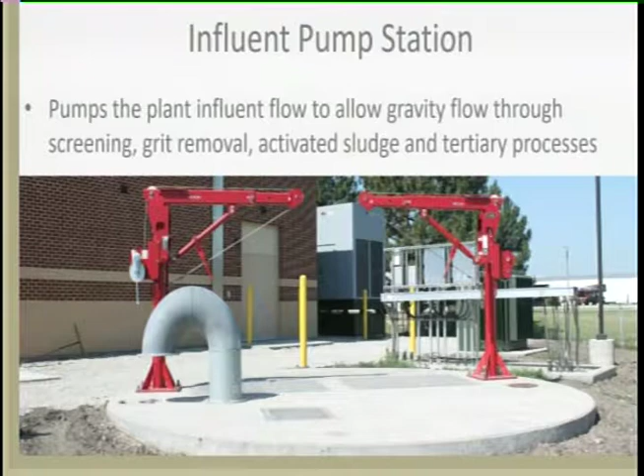To start things off, flow from the city's collection system goes into the influent pump station, and that flow is pumped up to the headworks facility where the screening and grit removal takes place, and then it can continue by gravity through the rest of the treatment processes.

There were some improvements to things like the septage receiving station, which provides a beneficial use of the treatment plant to the public for off-site septage loads. Some things were installed along with that, including valve control and a washdown system. We don't have it in our slide deck tonight, but there's also a reuse filling station out at the plant where contractors and county workers can come in and have beneficial use of the reuse water, the treated effluent from the plant.

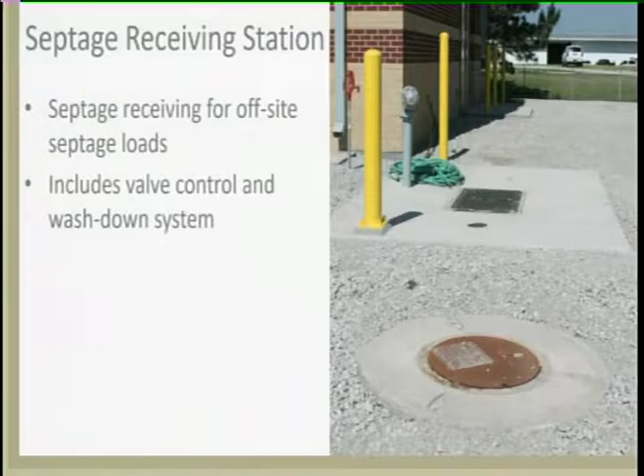Next you'll see the generator. This is a large generator located next to the headworks building and the electrical room there. It provides backup power generation to the critical process equipment at the plant should it lose power.

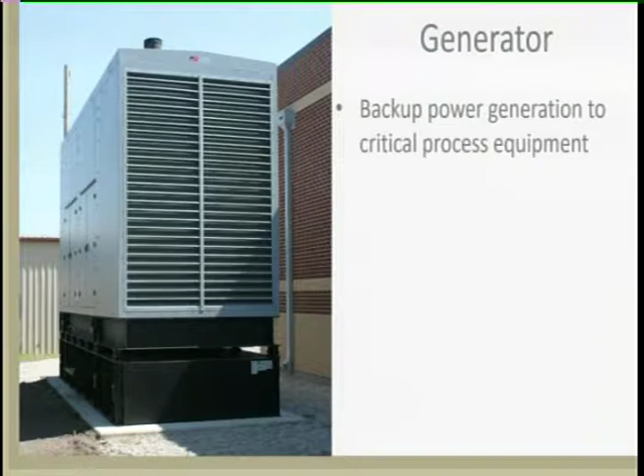Then to the headworks, there's a few photos here, one showing an aerial, one showing the screening equipment in the middle, and one showing the grit removal equipment at the bottom right. That's a 2-story structure there.

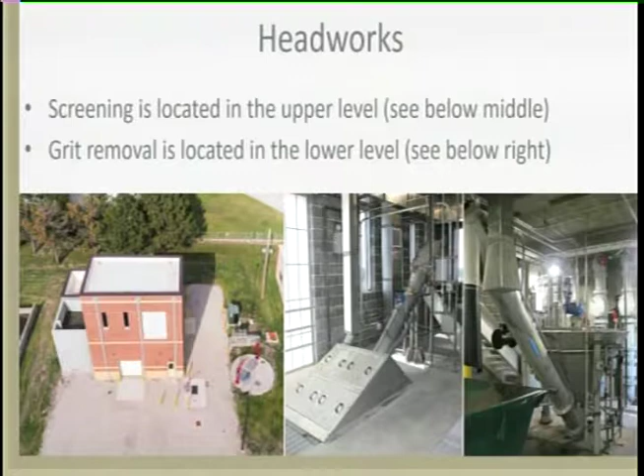This is one of the cool things the city did to showcase the project: they provided the aerial imagery you see in the slides tonight, and also a webcam for the duration of the project that showed the progress here at the headworks.

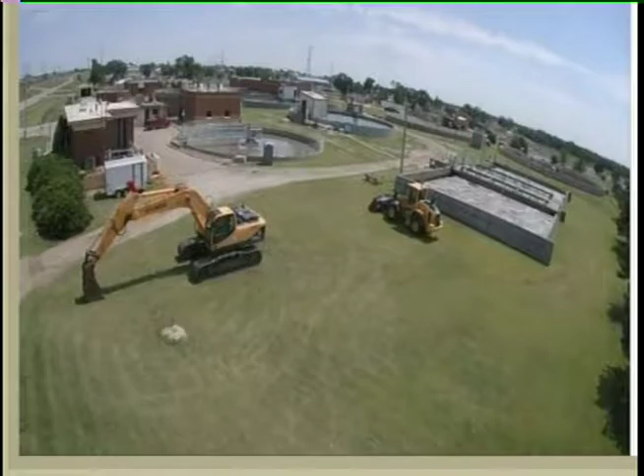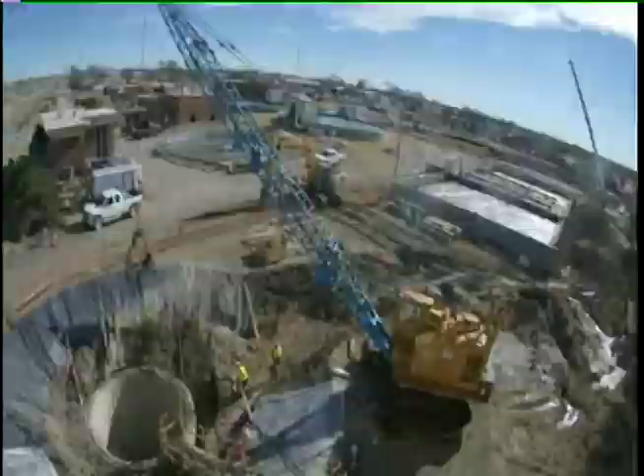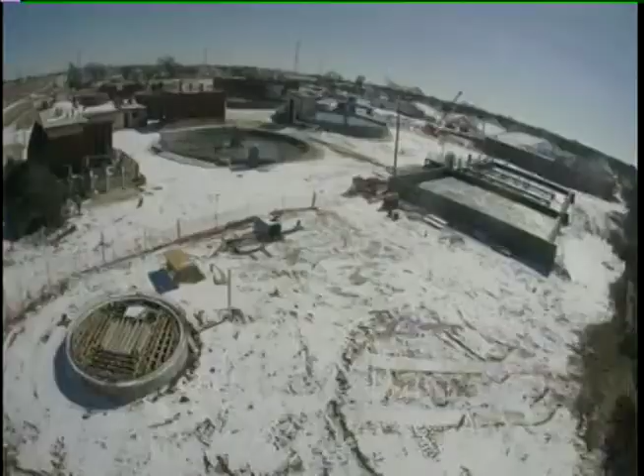So we have a quick time-lapse video that I'll briefly narrate showing the progress up at the headworks. It started out with that influent pump station, which sits at grade, but the contractor is installing a caisson construction where they drop nearly 35 feet into the ground, where it operates today. The headworks begins.

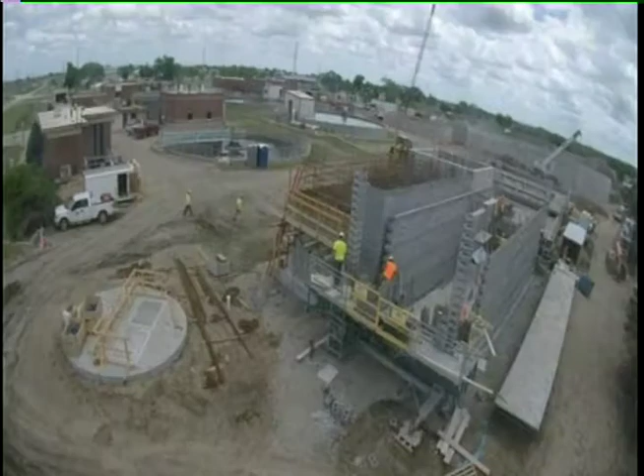It's worth noting that there was no time loss on the project and we worked in all weather conditions. Those brief flashes of white are snow from when we were pouring concrete, among other things.

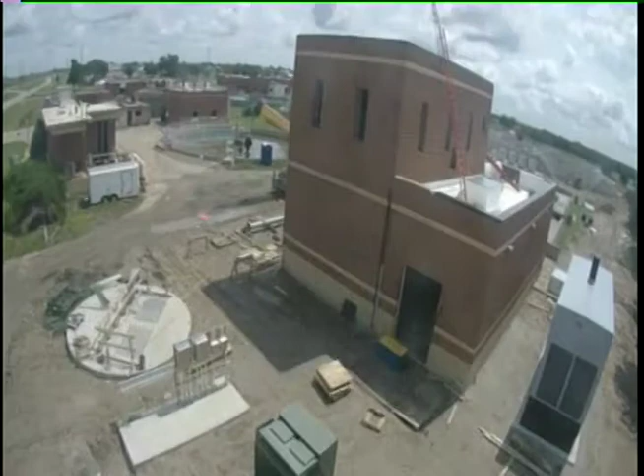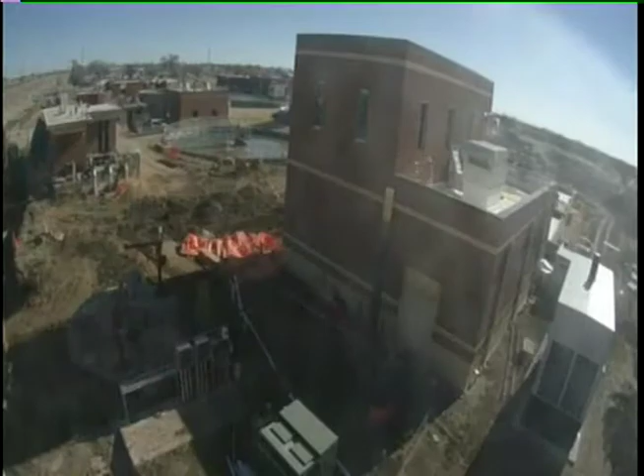We're getting close with doors on the building, then new site piping and HVAC. Then it'll move over to the new admin space in just a moment and show some of the structures there too.

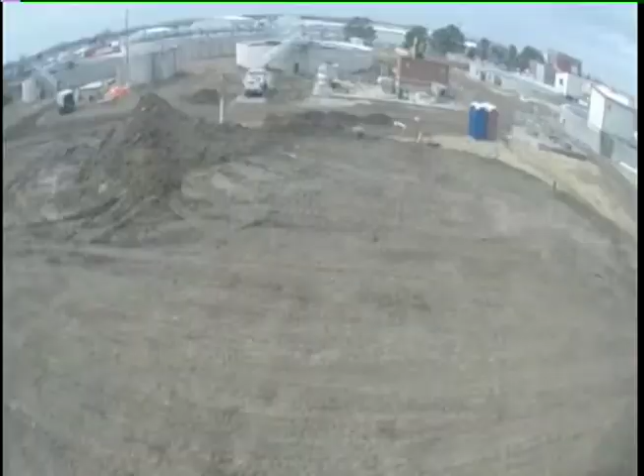Parking lot, main entrance there to the admin building. In the background, you may have seen the aeration basin.

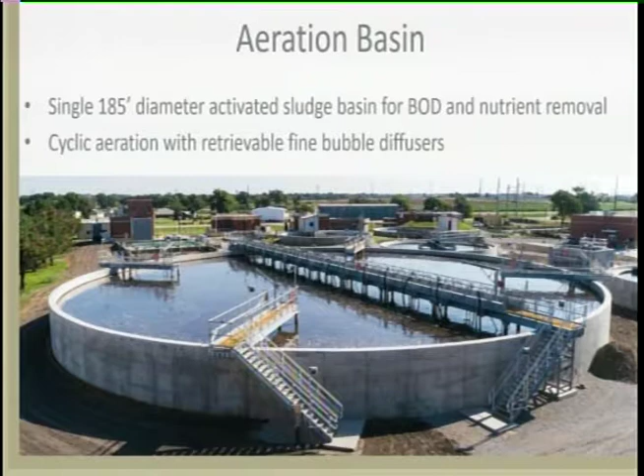This is the single 185-foot diameter cyclic aeration basin that provides the BOD removal, that's biochemical oxygen demand, and then the nutrient removal to the plant. It provides aeration along this bridge via the diffusers, and there are 4 additional mixer bridges that provide a complete mixed environment for that nutrient removal to take place.

That aeration is provided by a new set of blowers shown here.

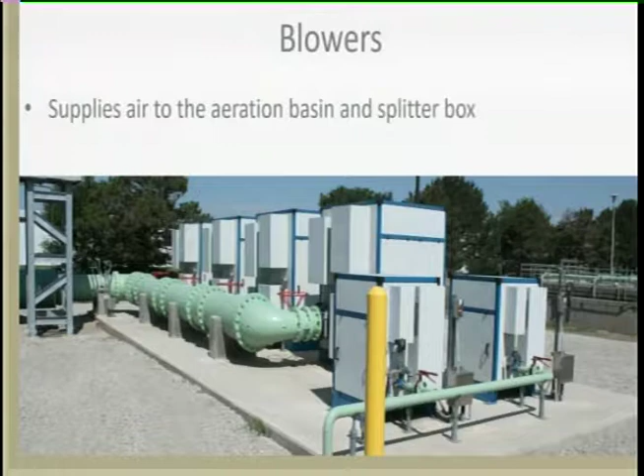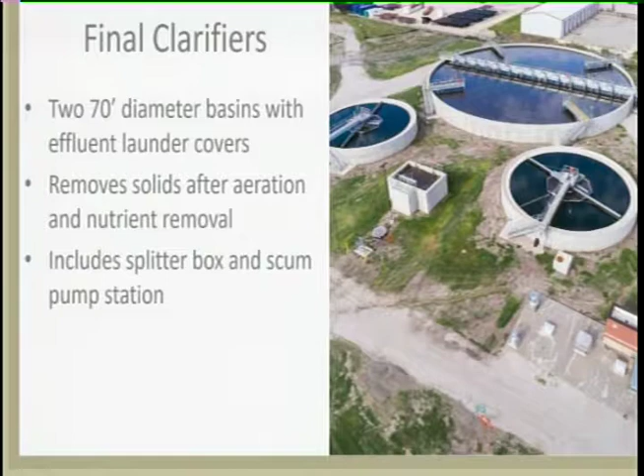This filter removes some of the finer particles from the treated wastewater, and it also helps facilitate phosphorus removal, increasing the nutrient removal and performance of the plant.

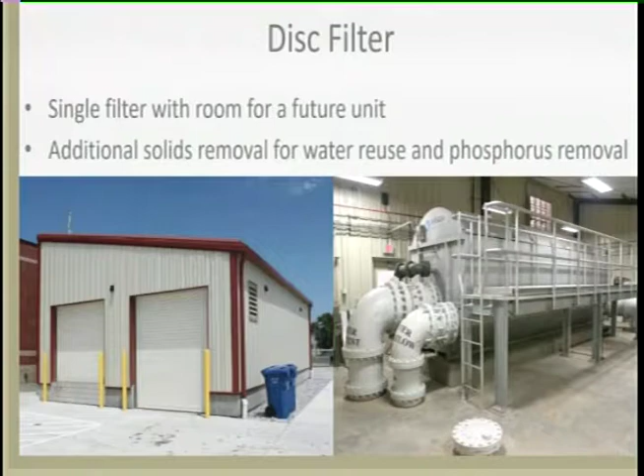Water from the filter building is then conveyed to disinfection. Here we have the ultraviolet disinfection system. It's a fully closed vessel type system, so it's very clean. We ate lunch in the space adjacent to this room today, so it was a very nice environment.

One of the big highlights for Jason, his staff, and the city is being a chemical-free treatment process now. This ultraviolet system allows us to achieve that, using electricity instead of chemicals to achieve disinfection.

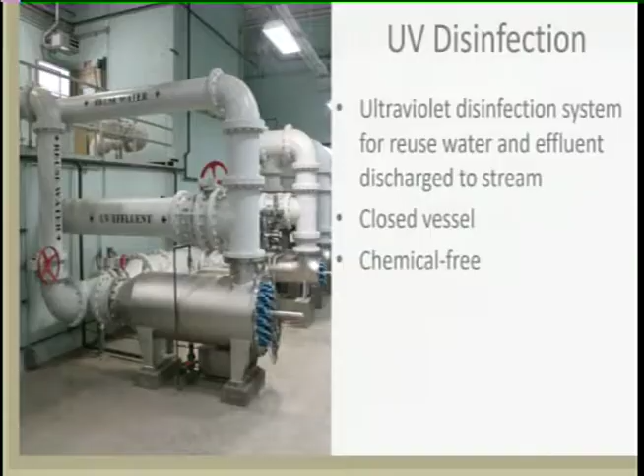From disinfection, we can go out to Chetolah Creek. This was just an opportune time to take an aerial photo. You'll see the plant outfall located here, and there were some improvements to the embankment around that outfall. This photo was taken after a recent rain event, and you can see how clear the treated effluent from the treatment plant is compared to the suspended solids out there in Chetolah.

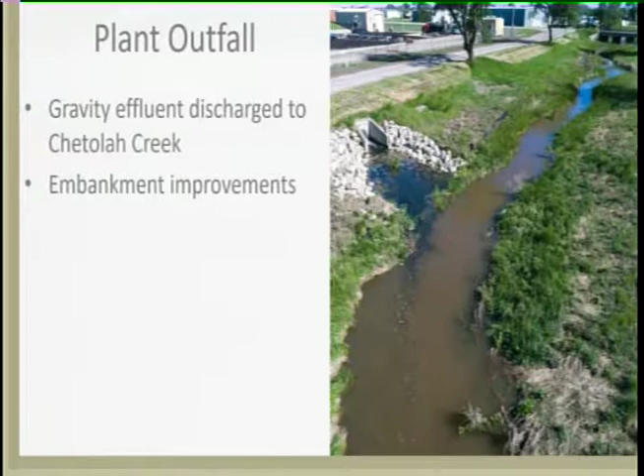Real quickly I'll touch on the reuse system and then some of the solids too. First we have the effluent pumps located adjacent to the UV area, where the effluent is pumped up to the reuse tank shown in the bottom right. We installed protective coatings to those basins to extend their life so those tanks provide storage for water before it goes out.

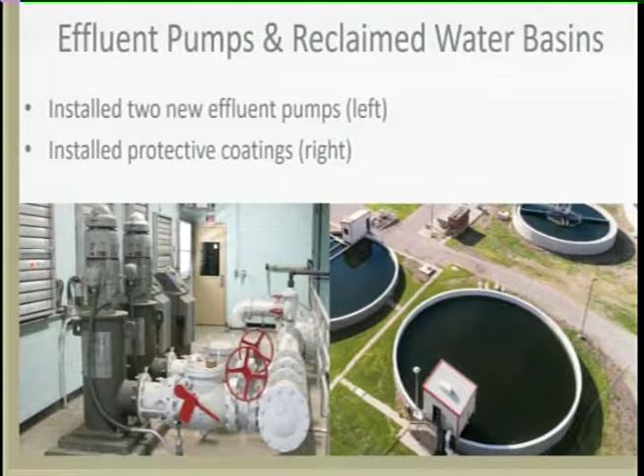It goes out to the golf course, for example, or other beneficial reuse in the city system. One of those off-site storage locations is the golf course. These golf course ponds existed prior to the project; we just expanded this one here on the westernmost side. You can see some of the piping installed to improve some of the overtopping that was happening at the golf course. That provides additional water storage for the golf course should they need it during one of the hot, hazy summers.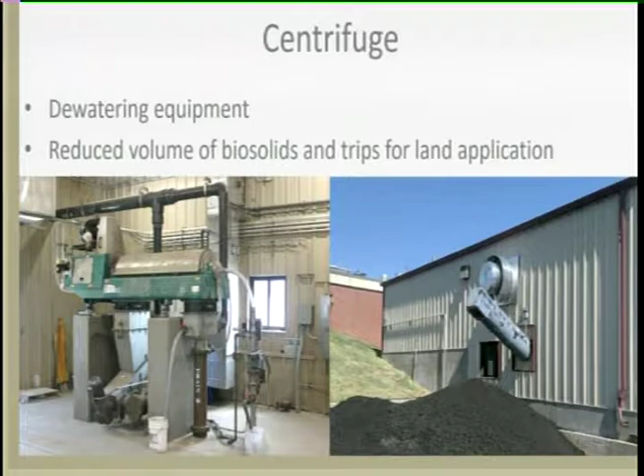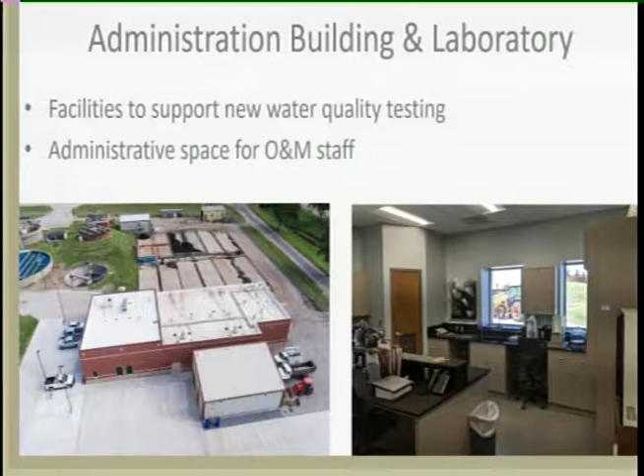And lastly, for me anyway, is the administration building and the laboratory here. Hopefully if you're out at the site today you get to tour those new facilities if you hadn't seen them already. It includes a new entrance to the plant off General Custer Road, automatic gates, parking lots, lab space, admin space, and control rooms.

We'll cover the SCADA controls and talk a little bit about the improvements made there. This is the brains of the plant. The SCADA provides on-site and remote operations for the plant. As you may know, the plant is staffed 8 hours a day, 7 days a week, but it is available for monitoring from the provided tablet or even a mobile device to address things if alarms come up, or if we just want to check on the status of the plant. We're able to do that.

Another maybe minor improvement, but it does improve communications with the systems integrator for this SCADA control and allows troubleshooting with the integrator if that's necessary. So far this has been running pretty smoothly. I know Jason likes to make adjustments on the fly sometimes just to prove that it works, and so far it has.

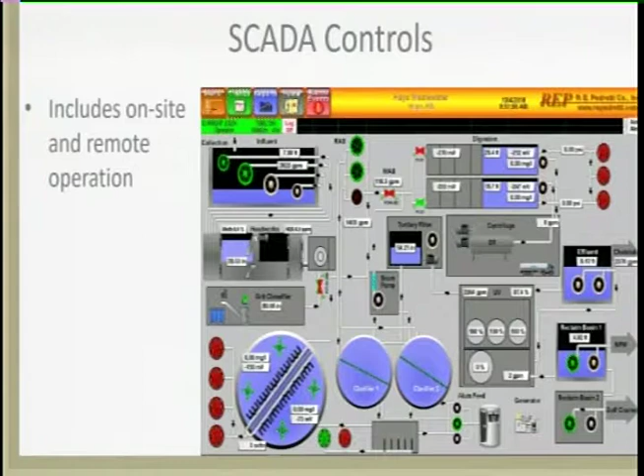And to cover treatment performance, I'll let you make the transition, Stan. We'll talk about the treatment of the plant itself. I might add too, as you know, the city extended fiber optics from City Hall to the water plant, from the water plant to the wastewater plant, and from the wastewater plant back to City Hall. So you also have capabilities at the water plant to view the operation of the facility and make changes. There's somebody on duty there at a time when there's nobody at the plant.

This is one of two slides that we're probably the most proud of. It summarizes everything performance-wise that this plant has to meet based on your current permit, which was put in place on September 1st, 2019. Those limits are shown here in orange, and the gray is limits that we anticipate, through conversations with Kansas Department of Health and Environment, will be future limits coming down the road.

KDHE is working with EPA doing TMDL evaluations and studies on the Kansas River, the Smoky Hill, and it reaches up to the discharge here from Hays. They've anticipated that in the future there will be much tighter nutrient limits. We've been talking about that since we started, and you probably heard about it many years before that. So what you see here, the green bar is a summary of all the testing data once we really got the plant into full operation and the weather cleared up, showing what the average parameters have been without really trying to performance test it.

You can see here clearly on BOD, with the green bar, that it's operated at 25% of the limit on BOD, about 30% or less of the limit on TSS. The limit on nitrates and nitrite of 10 has been running about 1.4, so a little over 14%. Ammonia is less than half, and phosphorus is right at the limit.

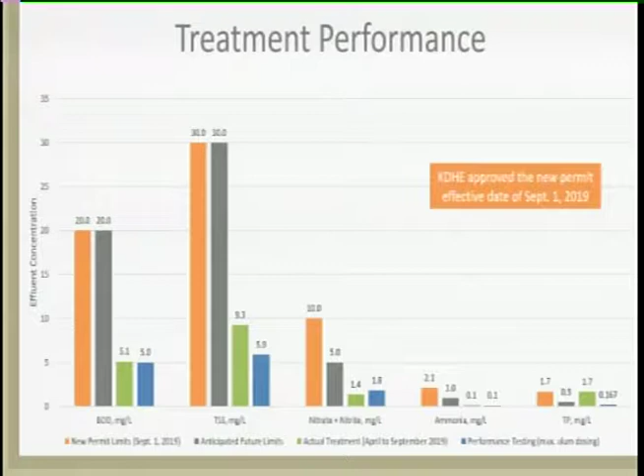The second slide is the cost summary. Like I said, there were no change orders. The design and construction of this project was $28 million. The facility planning and the owner's rep services was $1.5 million. During the SRF payout, where you were borrowing money during construction and hadn't started paying debt service yet, there was $205,000 in debt and loan interest.

Part of the contract negotiated with the design builder was that there were damages if he did not complete substantial or final completion within the contract date. But there was also an early completion bonus included, available if he was able to put this plant in operation earlier than the contract date. The idea was that there were many things contingent upon getting that running in the summer, when you can start it up in the best and most efficient way.

Certainly our services could be reduced by getting it done complete. So the city realized many savings, and this contract was set up for sharing that savings with the contractor. As we mentioned earlier, he completed it 59 days early, and there's an $88,500 bonus. The total amount of this is $30,272,000, which is pretty close to being right at the SRF loan amount. So the financial part of this plant was very successful, as well as the performance.

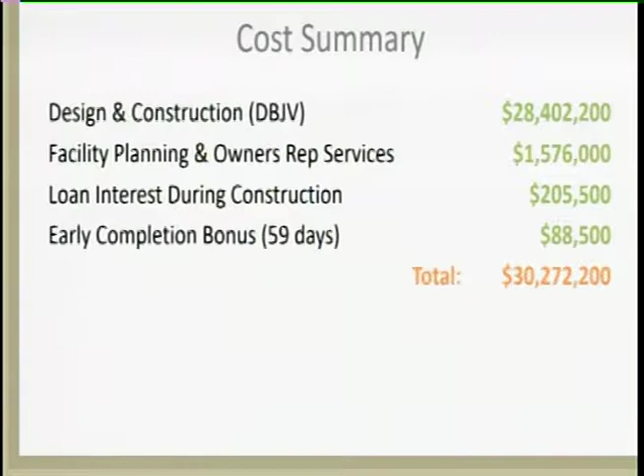Good evening, everybody. I'm Jeff Keller with Burns & McDonnell. I'm here with Travis Stryker, CAS Construction, and we represent the Design Build joint venture.

I just have a couple of slides here talking about the green solutions aspects of this project, and we chose a few that are more than token elements. They really provide substantial value to the project in a lot of ways. I just want to cover them very quickly here.

First of all, when Eric was showing the original photo from 2017 of the treatment plant, he showed you those trickling filters, those big round filters. Those were filled with rock, basically about the size of a softball. We had to demolish those, but the project also had a big demand for aggregate, rock, gravel roads, the aggregate that goes under the new structures. So when you think about it, we're demolishing rock and hauling it off and then buying rock to bring it in. That doesn't make any sense, and it's not a sustainable approach.

So instead, we brought in this rock crusher. It's quite a device, and it took those mountains of rock that we pulled out of your trickling filters and turned it into gravel, turned it into aggregate, giving a beneficial reuse for some of that demolition material.

That contributed to a big part of the savings we were able to see on the project. The next photo is the UV disinfection modules where we had lunch, and as Eric alluded to, it eliminated the use of gaseous chlorine at the treatment plant. Gaseous chlorine works great to disinfect wastewater, but it's also very, very dangerous, very toxic. Getting it out of there is a huge benefit, not just to the safety of your employees, but also to the safety of your community. So that's a big benefit.

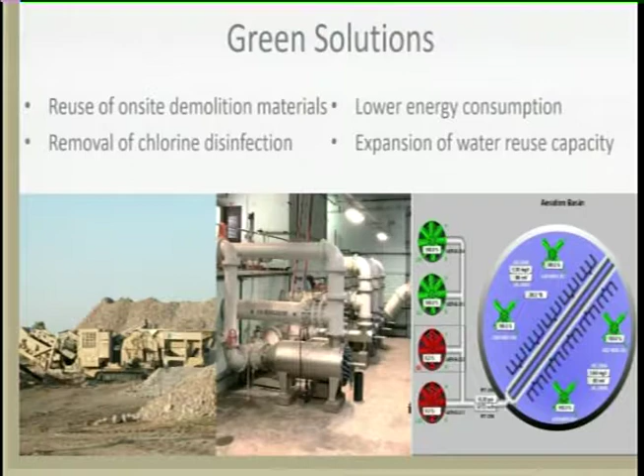I'm going to talk about some construction highlights now, but I really have to attribute this to CAS Construction, our partners, Travis, Jeff Pearsall the superintendent. If you guys met Jeff, he's a pretty impressive guy. He did a great job and was a main driver in making sure this project got done on budget and on schedule.

But let's note that safety is always a priority for us. We can't get work if we're not safe, and the more safe we are, the better we can be. So, 325 safety orientations—people coming on site being trained to be safe—and no recordable injuries, no lost time incidents for over a two-year period of activity on the site. That's a big deal, especially when you've got your own staff trying to operate their plant while we're running around them, digging holes, connecting wires, and doing all sorts of things.

I'm going to hit schedule before I talk about teamwork. The schedule came in 59 days ahead, with what I'd describe as more than just adverse weather conditions—68 inches of rain during the project. I don't have to tell any of you about the amount of rain we got. Snow, typical snow, lots of cold temperatures. But because of this teamwork, I think that played a big role in us finishing almost two months early.

So let's talk about teamwork—I mentioned this over lunch. Travis and I, and folks at Burns & McDonnell and CAS, have worked together for years. I've worked with them for 20 years, 30-some projects. We know how to do a job right and make it work well, but it can't work well if the other member of the team, the client's rep, isn't engaged, if they don't do their job well—it makes the project difficult.

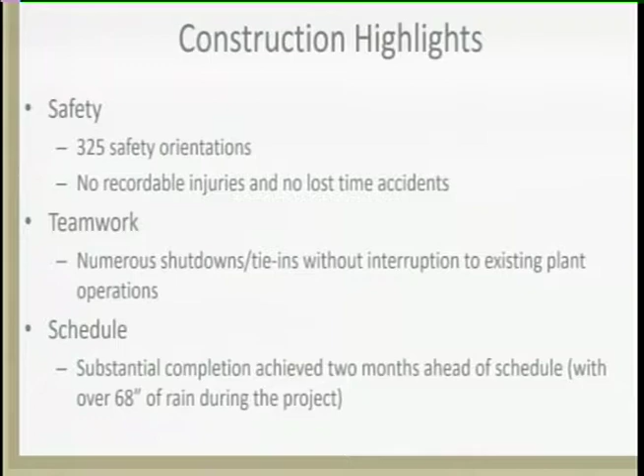These kinds of numbers are really a testament, not so much to us, because we were just doing our jobs, but to the city and the folks on the team, and HDR, who really made sure the project went well. We had a number of very late night tie-ins, interconnections, shutdowns, and startups where we did a lot of planning with Jason, his folks, and Jeff. They made sure that things worked as planned, that things happened when they were supposed to happen, and without their help we could not have been as successful bringing this project to you as we were.

So I just want to send another thanks out to the multiple people who helped make this successful.

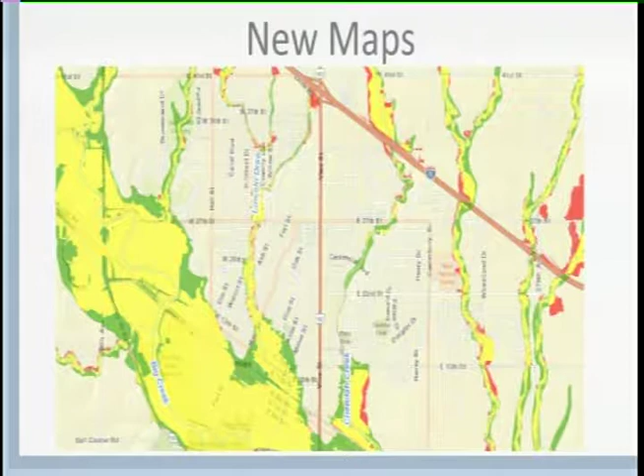So the maps will be different in a lot of ways. Besides the LiDAR topography data set I mentioned earlier, the maps will be based on two-dimensional modeling, or 2D modeling. This is much more accurate and actually depicts water flow in areas with limited development. We were told by FEMA and DWR that the Ellis County mapping project was one of the first all-2D Zone A projects done in the entire country.

This remapping project for Ellis County has been delayed for several years—we've been on the list since it started with the map modernization program in 2005. That 5-year project is now in year 15, and I think some benefits to that delay were our ability to use increased technology.

The new maps will be electronic, not paper as they are now. There'll also be lots of interactive tools available, such as being able to click on a parcel and get an accurate grade elevation, base flood elevation, and various measuring tools on any parcel within the county. Overall, the maps will be interactive—that's what they call the DFIRM, or the Digital Flood Insurance Rate Map.

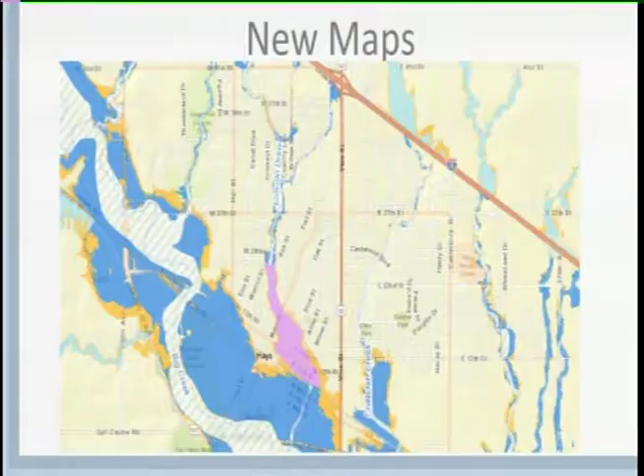This is a quick video that briefly shows the 2D modeling in action. I'm not going to pretend to be an expert on 2D modeling—I'll leave that to the engineers—but this is the type of work that was done. It goes pretty quick: the pink represents water flow and inundation of certain areas, used to model different elevations of the base flood during certain rain events.

So I mentioned community review, which has been going on for some time now. Public review will kick off with a public open house meeting on November 6th—I'll talk more about that in a moment. There's also a project website, which is very important for people to look at, especially if they're affected by the floodplain. The website contains the draft maps I showed earlier and other pertinent information such as story maps, timelines, meeting presentations, and technical reports.

Due process requirements for state law and FEMA after the map is completed take up to 1.5 years. This includes several layers of quality review, a 90-day appeal period, and a 6-month period for communities to adopt the new maps and update floodplain ordinances if necessary. That being said, we're looking at an effective date likely sometime in 2021 at the earliest.

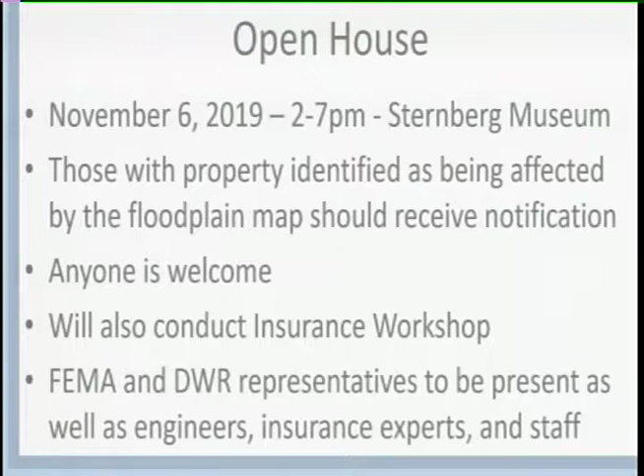It's a come-and-go meeting, and anyone's welcome to attend. There'll be individual laptop stations set up, so anyone can come in and talk about their specific property. There'll be insurance experts on hand to talk about flood insurance, and there's actually going to be an insurance workshop for insurance agents, real estate agents, and lenders who are interested. There'll be lots of representatives there from FEMA, DWR, the engineering staff that's been working on this mapping, and city and county staff.

I'd take any questions you might have. Commissioners?

In the past, when areas were designated as a floodplain, property owners were able to somehow, I don't know what the process was, petition or something of that nature, and be able to take property out of a floodplain. Does this affect that? Once you have this mapping done, can somebody still do that? Yes, there will still be opportunities.

It's what they call a LOMA, or Letter of Map Amendment process. A property owner can obtain survey data, what they call an elevation survey and elevation certificate, and submit that work to FEMA, who then, if it meets the criteria, can remove it from the floodplain. So if it's elevated above base flood elevation, whether that be lowest adjacent grade to the structure, or maybe the entire lot, whatever it might be, there are different types available. That will still remain after this.

So if property owners, whether currently developed or developing later on a parcel that's in the floodplain, meet the proper criteria, they can still go through the process to have that property removed.

In your narrative, you pointed out that this is also done for insurance rates and so forth. Can you give me some examples of where else this mapping is going to be used? It seems like a significant amount of data, and I was just wondering how you're going to be using that.